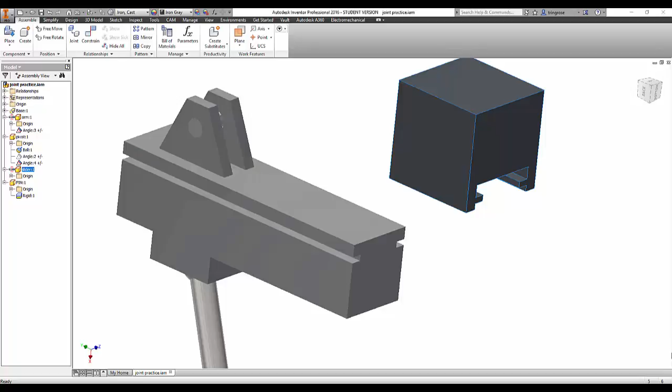The first thing to keep in mind when we're using the joint tool is the tool thinks that it's very smart, when in reality it's more like this.

Dummy. Hi, dummy. How did you get that cap on your head?

You earned it. When I try and just grab the two surfaces that I want joined together, more often than not, it's going to think that I want a rigid constraint. I don't want a rigid joint. I want a slider for this. So I need to manually go in and make that change. Not a big deal, just something to be aware of.

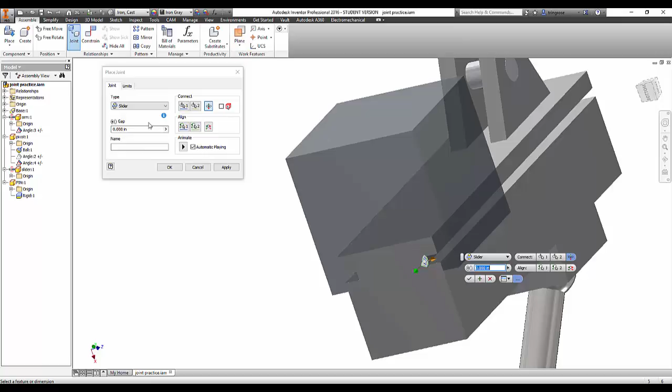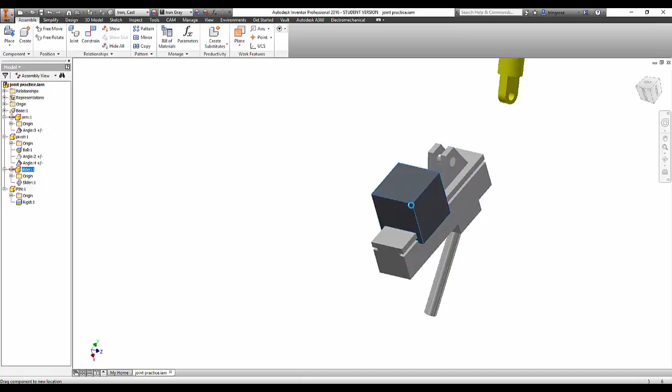The key thing with this slider constraint is it locks in on a number of my degrees of freedom at the same time. I can no longer move this object here left to right. I can no longer move it up and down. I can no longer rotate it. It only has the ability to traverse in one planar direction. So that's the one locking point with the slider, it just keys it in for that one movement and that one movement only.

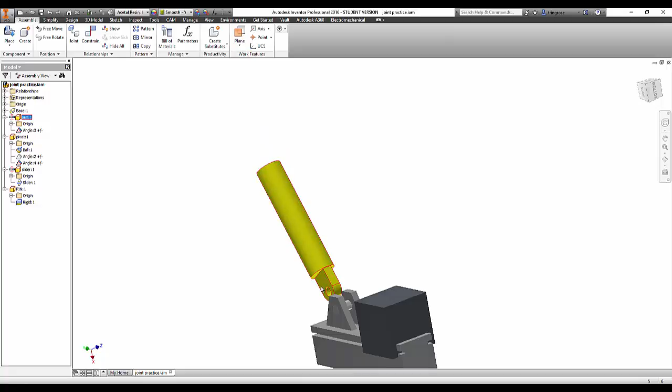The next joint we're going to take a look at is the cylindrical joint. This works somewhat similar to the slider in that it locks in a large number of parameters all at once, but this is going to leave me with one that I can traverse on and one that I can rotate on. So let's go ahead and join this up. And I know that I want a cylindrical.

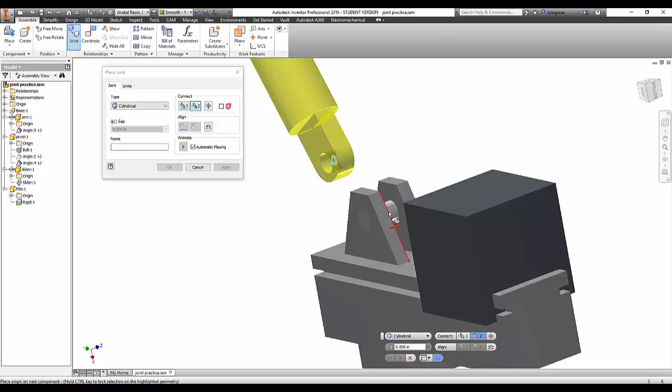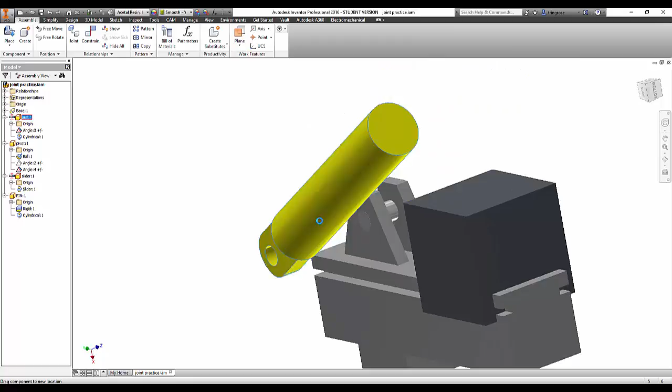So I'm going to line up and say that I want the center here and the center of this pin hooked up, and you're going to see it's going to do a little dance and spin around. It's going to show us that it still has movement along this axis here, and I have rotation as well. So I can move, this is going to pivot on that axis, and I can move back and forth anywhere along here. Oftentimes to go with this, we'll need to add a mating constraint in order to get things to sit properly.

I'm really, really sorry about this. Petrificus Totalus.